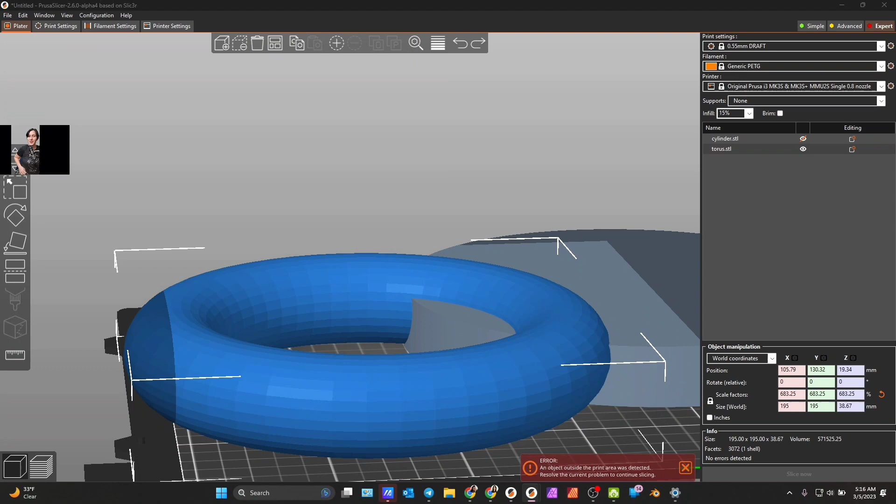Well, I'll just show you. I'm going to take this and move it to the side because I had everything measured out, and it makes it easier to just have it to the side. I have a 2-screen setup, and it makes it easier to just have all the measurements so that I don't have to waste time using my broken caliper. My caliper is off by half, so I have to look at it and try to make it work, and it just doesn't want to work for me.

So we're going to not do that. I'm just going to use the measurements I already have, make things go faster, just be as efficient as possible because everyone loves efficiency, right?

So we are going to use our Prusa slicer, and I'm using, if anybody is interested, the Alpha 4 2.6, the one that has the organic supports. But you don't need, for this, what I'm doing, you don't need to have the Prusa slicer 2.6 for most of what I'm doing, okay?

I will try to remember that most people don't have it. The only thing that maybe you might want the 2.6 for is this, I might cut something on its side, but I'll try to remember just to rotate it and then cut, okay? Because that's what I did for the longest time.

I never used the rotate. And to be honest with you, the rotate tool, the cut by rotate still needs a little bit of work because as you rotate it... so quick note, I do everything on the right-hand side. There's a table that when you open something, here, I'll show you.

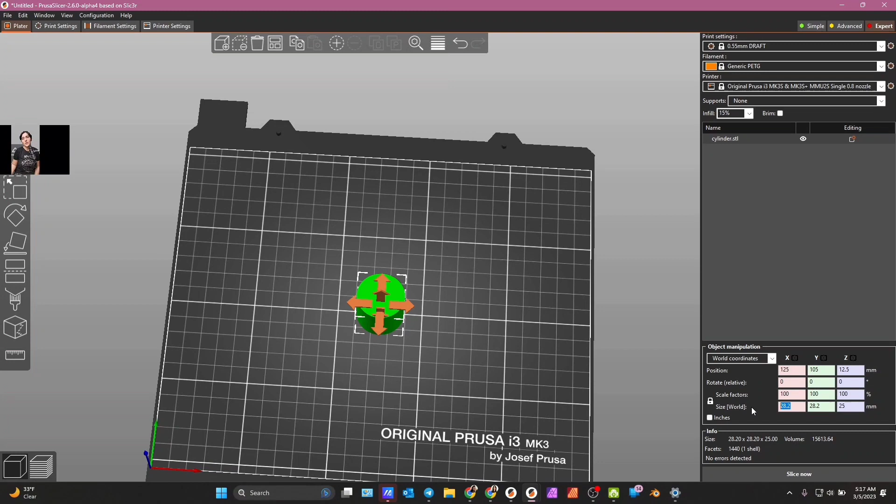So first, really quickly, we're going to go to Shape Gallery, and we're going to add our cylinder. Add to bed, okay? So you're going to want to make sure that it is at least, so that it doesn't fall over, you want it to be at least around the same diameter as the spools that you're putting on top of it. So that's about 200, okay?

And you're going to want to unlock, or you're going to have a really tall item, and that's just not going to make sense, okay? So let's put this to 25. That's about right, okay? Now, what we're going to do is, like I said, right here you're going to notice that this object manipulation came up, okay?

So I do mostly everything to the right here, all right? Now, that's kind of important because I could rotate things on the left, but if you rotate it like 270.5 or 90.3, well, if I go to rescale that object, you're going to have a lot of problems.

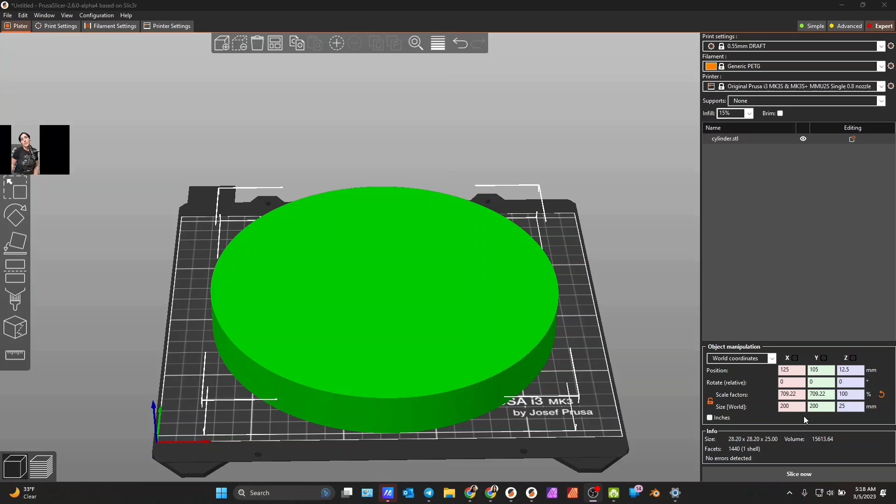It's not going to scale exactly. It's going to scale a little bit slanted, and it will cause problems later on, and you have to undo a whole bunch. It's a headache. So don't do it. It's tempting. Don't do it.

And when you do everything on the right-hand side, it's kind of nice because what you can then do is say, hey, well, I did that by 90 degrees, I'll just undo it by 90 degrees. And you can actually do negatives in the side, in the rotates. So highly, highly recommend getting used to it. And it gets really fast, okay? You get pretty fast by it, okay?

So quickly, let's move on. We are going to go Window, Shape Gallery. We're going to add a torus, okay? Add to bed. Now, the torus is going to be small, so let's make this 195, okay?

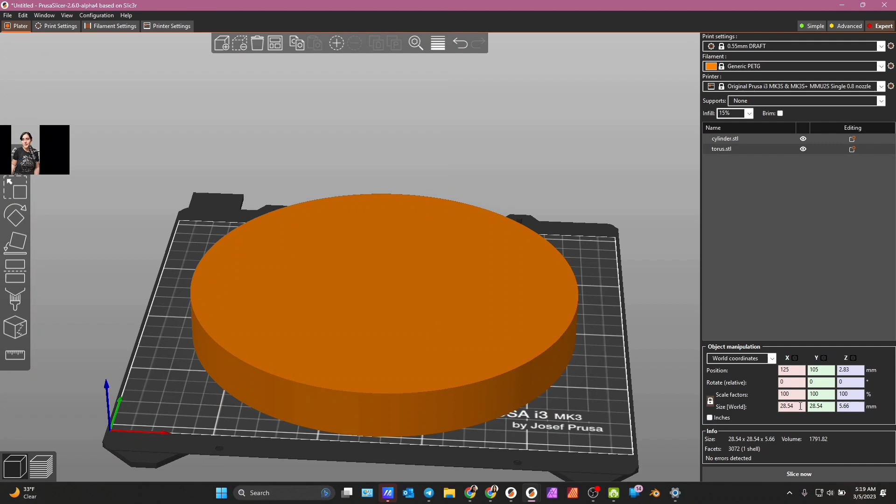This is probably the one time I could have kept the torus locked so that it will keep somewhat of the right size. We're going to cut a little bit off the top, a little bit off the bottom. Otherwise, we're going to have little rings, like right here, if you notice.

The first time, of course I dropped it - it's the drop troll. So right here, there are little rings, okay? Because when I did it originally, instead of cutting it on the bottom, I just made more toruses and subtracted them that way.

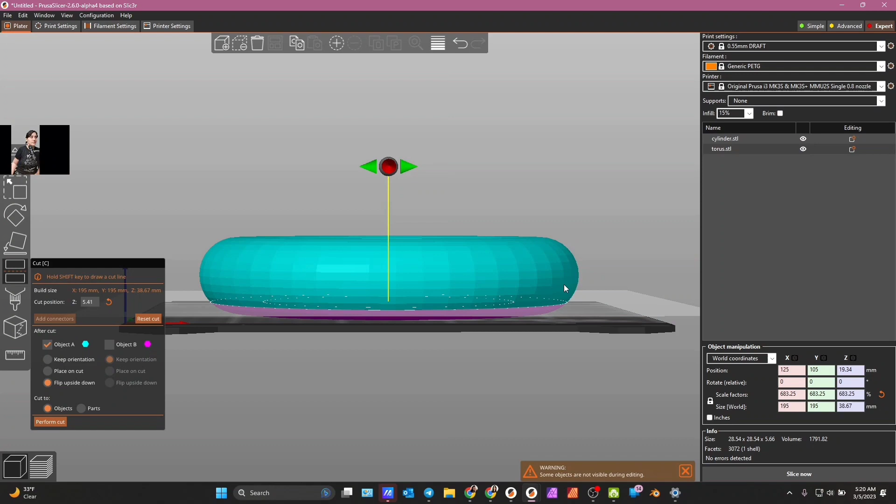But this time we're going to cut it so we don't have that problem. We're going to cut from the bottom and go down because you want to keep the curve. If you cut up too much from the top, you're not going to have much of a curve, and you want this kind of nice curve. So let's take off 5.

And we're going to only keep A, we don't want part B. Now let's cut again 5 - I flipped it upside down so I didn't have to do it, and we want to cut it off the bottom. You could cut it off the top, but it's easier to cut off the bottom, so that way you cut 5 off the top, 5 off the bottom, same off both. Perform cut, and you're only keeping A.

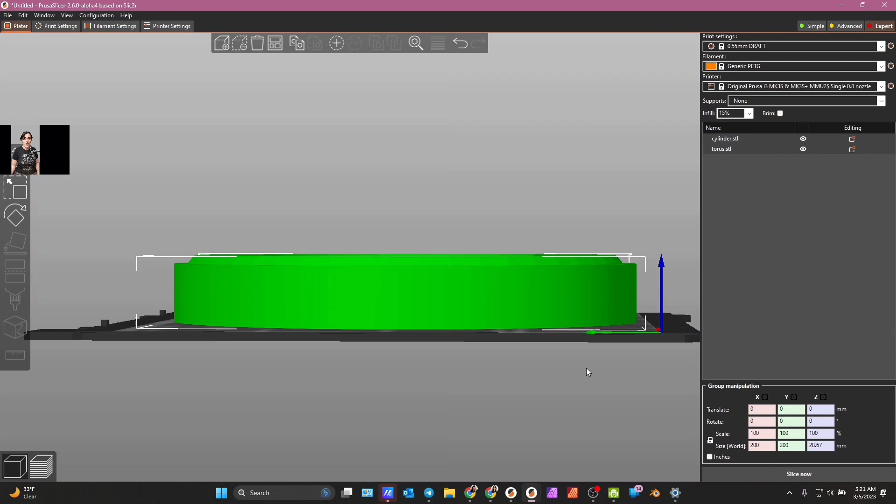So now what we're going to do is merge them together. You can hit Control A, but let's say you had more objects on the plate - for some reason you have to click the item, shift-click to click on both, and then right click and hit merge.

But over here under name, you would hit Control. I don't know why - I don't know why it's different. But whatever, it might be because it's alpha 4, maybe it's different in alpha 3. I don't remember, we're not going to linger on that.

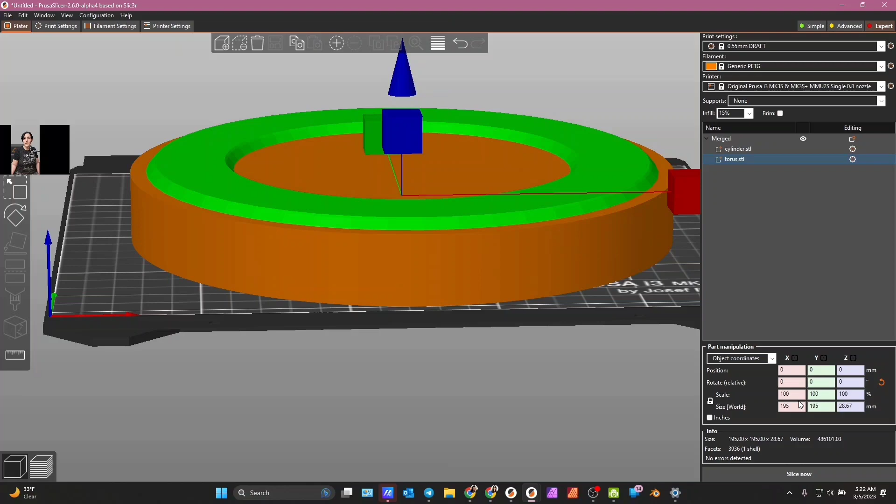So we're going to make sure that everything is centered. Under merged, we're going to hit torus. I'm going to go to object coordinates, and you see X and Y are 0. That means they are centered perfectly in the middle.

So I'm going to right click, we're going to go change type, and we're going to make it a negative volume. So when you slice now, you're going to notice that maybe that's what you want, but that's not what I want. We're going to need to move this up a little bit.

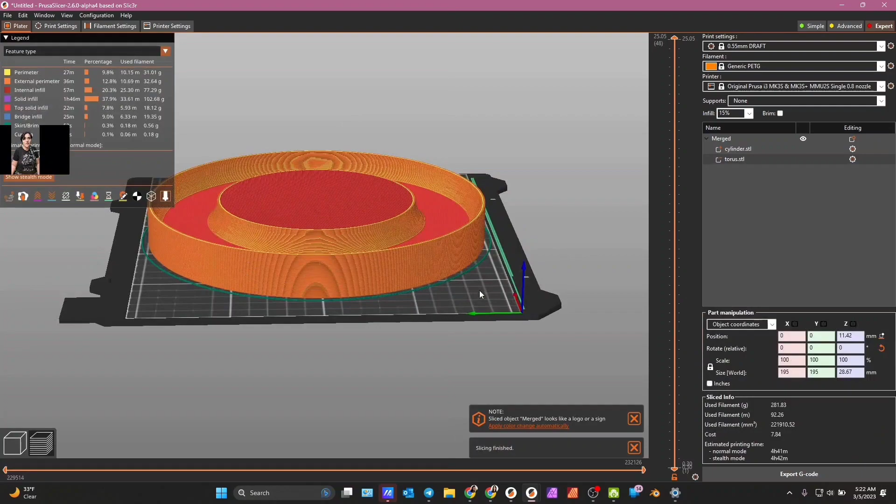So let's slice now, and you're going to notice that that is what we have now. So I'm going to want to move that up just a little bit more, to like right there. So let's slice now. And it's kind of good to have a little bit more on the bottom because that way you have a little bit of weight on the bottom so it doesn't topple over as easily.

And then if you want, you can even lift it up more, or if you want, you can make the base a little bit smaller. You can make this cylinder - it doesn't have to be 25, it could be 20 if you want it to be.

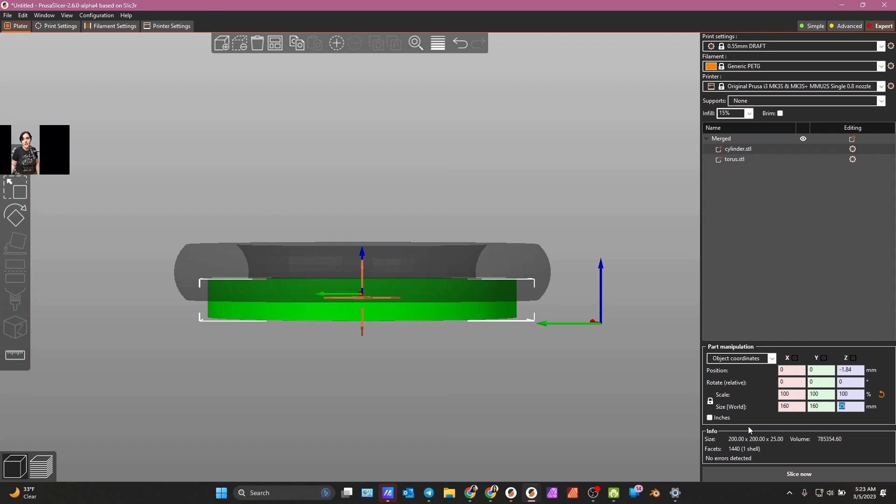Oops, sorry, never mind. Let's take this and undo the lock. We're going to go 20. Okay, now let's see how that looks now. You'll notice there's a little bit more of a curve now. So we're going to want to make this part not as big.

So we're going to take the torus. Now you could first do the toruses and then copy and paste it, but I recommend first making it into a negative volume and then copying and pasting, because you can't click a whole bunch and then change type - you'd have to do them individually. So if you have like 15 that you want to make into a negative volume, you have to do it individually.

So first change it to a negative volume, then we're going to copy the torus. We're going to paste and then resize that, and resize it over here.

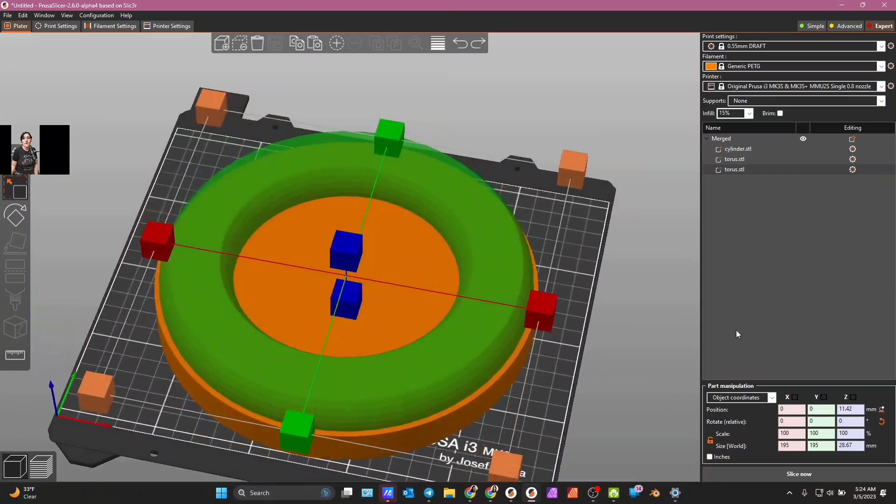You might be tempted to resize it on the left, but you'll notice that if I resize it over here, it's also going to resize the Z. So when you hit slice, you're going to see that weird thing. That's not what we want, so we're going to undo that, and resize this over here instead.

So let's say we want our size to be 170 and 170, and we're going to keep Z alone. You could probably even go 160, and then you kind of play with this until you get exactly what you want. There's a lot of playing with variables, and you'll see that is much bigger.

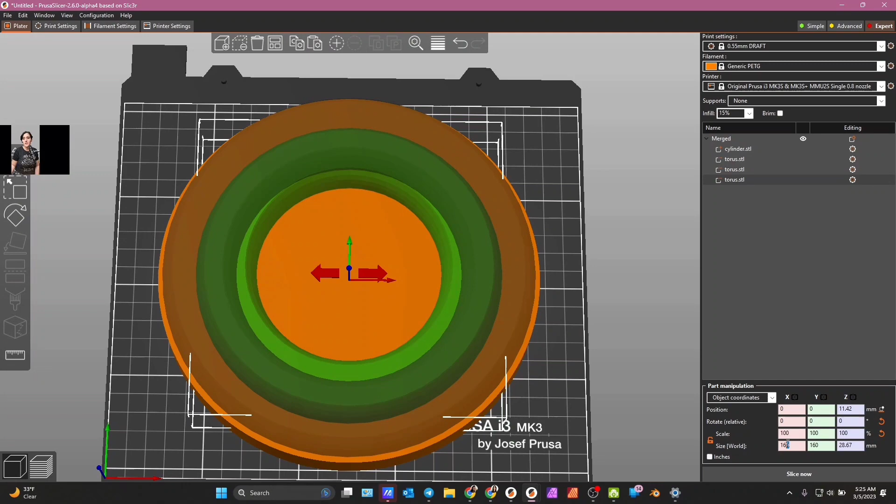It's bigger now. Then what you could do is add a third one, or just play with it, but for video's sake and making it faster, I'm just going to copy and paste a third one. I'm going to make this 140, tab 140. I could probably do 130 on that one.

So there you go. You'll notice that it's much better, and it'll make it a faster print too. So now we have that.

Now what we're going to need to do is first, real quickly—this always kills me. Bye-bye. Okay, so how do we get that part that you just showed me where you screw one thing into another?

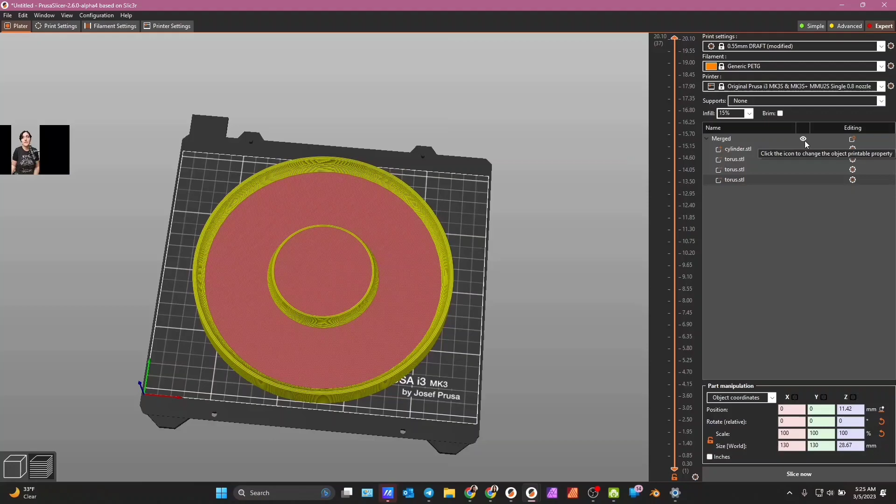First we're going to take this and take it off the bed for a second, and we're going to move it off. This is the one thing I actually do use on the left—that moving the item off.

Now we are going to go to Window, Shape Gallery, and notice that they have already loaded an M3 screw. We're going to add this to the bed. It's itty bitty, it's so cute, so let's make this itty bitty M3 much bigger.

Let me see what I had the sizing as, so that we can get exact sizes. Let's see here—no, that's not the one I want. Okay, let's find the one that I need.

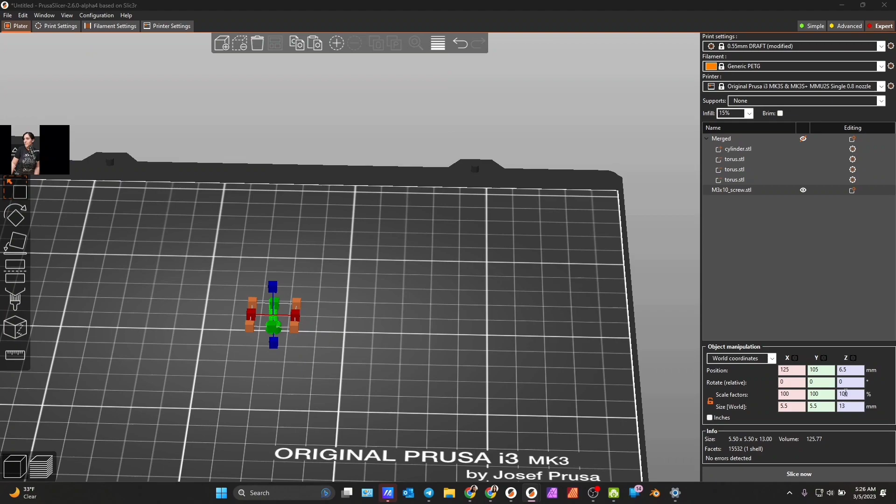Okay, the size I had for that would be... so we want to make this 85.08. Let's make this 85.08, tab, 85.08.

Oops, that's not what I wanted at all. We all make mistakes. And to be honest, I just realized that these are my scaled down version sizes—this will be the size after it's been scaled down 99.5%. I just realized I accidentally closed what it was before, but this would have been like 86, I believe the original was, so I'll just do 86 to begin with.

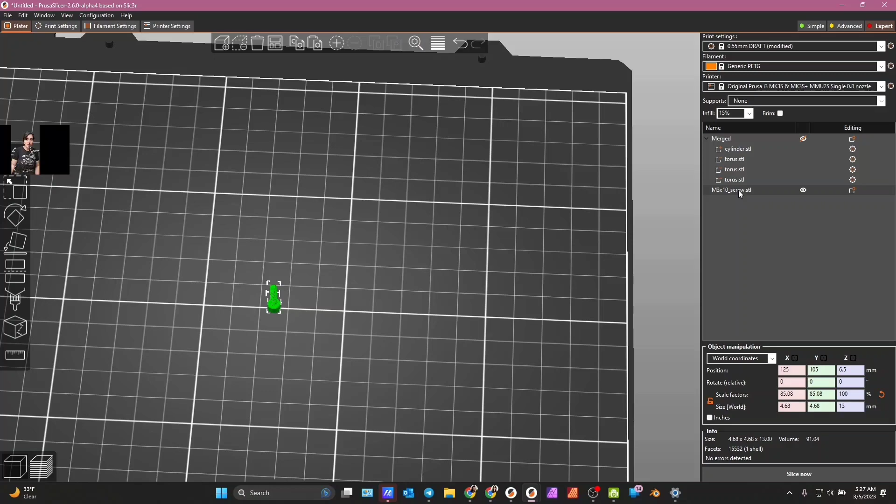We'll start with 86 and I'll show you how I would make it smaller, just so you have that if you need it. So we're going to first just keep it scaled—we'll start there, and go 86, tab.

You're going to notice that you have something much longer and bigger than what you need. So we're first going to cut it down, because we don't need one that's that large.

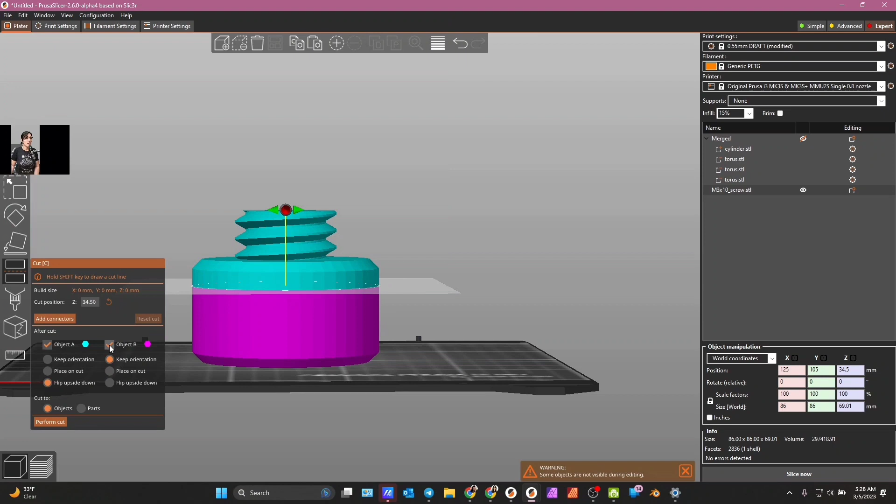So we're going to only keep B because we don't need A. Then we're going to cut it again—this time we want A but not B. Go about right there, and we're going to perform the cut.

Now what we're going to do is—this is 86, now remember, well first let me create it. So first we're going to create the column.

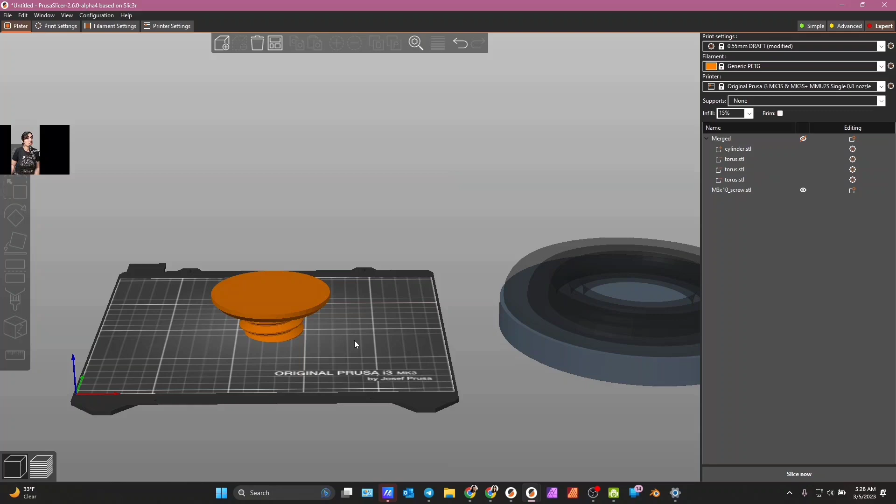Now what we're going to do is go to your Shape Gallery, add to bed. We're going to make this column 86—is it locked? Okay, so yeah, 86.

Now we're going to merge them together. So let's merge them together—click the two you want, so click, control-click if you're over here on the right, and you're going to hit merge.

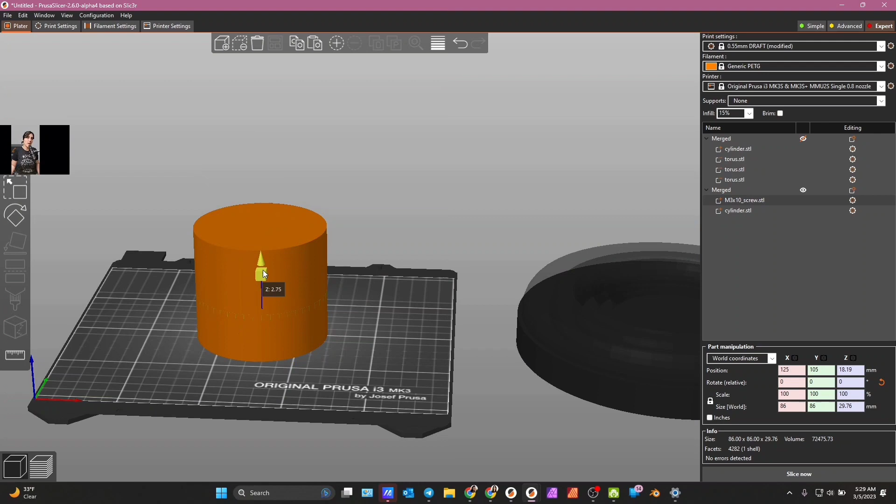Now what we're going to do is move—and the reason you do it that way is because before you can move one item up or down, you have to click on the one you want. So now you'll see that it's like that.

So this item is going to fit into there, okay? Every once in a while it does give you problems. Sometimes when you scale one item, you'll notice, like if I were to... well, we'll just do it, it'll probably come up as I make the video. But sometimes you'll go here and you'll have this... well, let's just do it, okay? So, lost my train of thought.

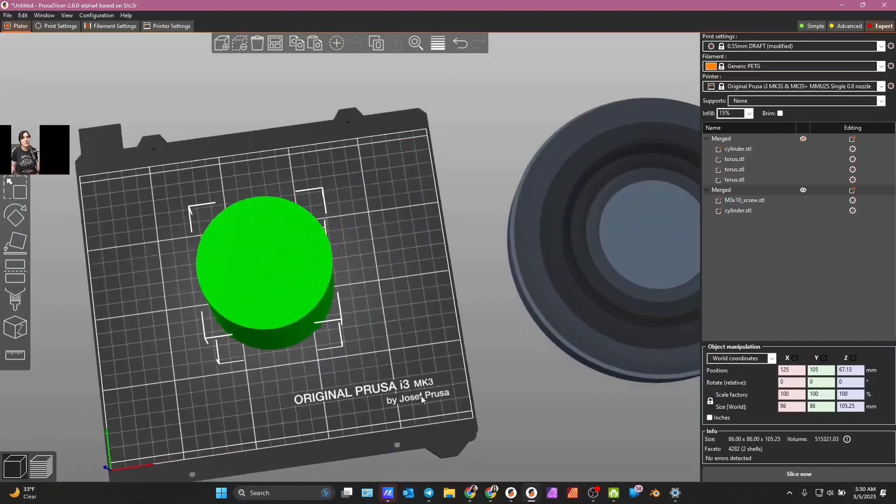Okay, so this you're going to notice right here is a little bit too big still, so we're still going to want to cut it. So I'm going to cut it, and we're going to keep the top. Object A. Yes. Cut. Okay, so that looks like it'll be good.

Now what you can do, if you want, you don't have to, is scale this like so and make it a little bit bigger so you don't need supports, okay? Because if you have about 45-degree angles, if it's like 45 degrees, then you don't need supports, all right?

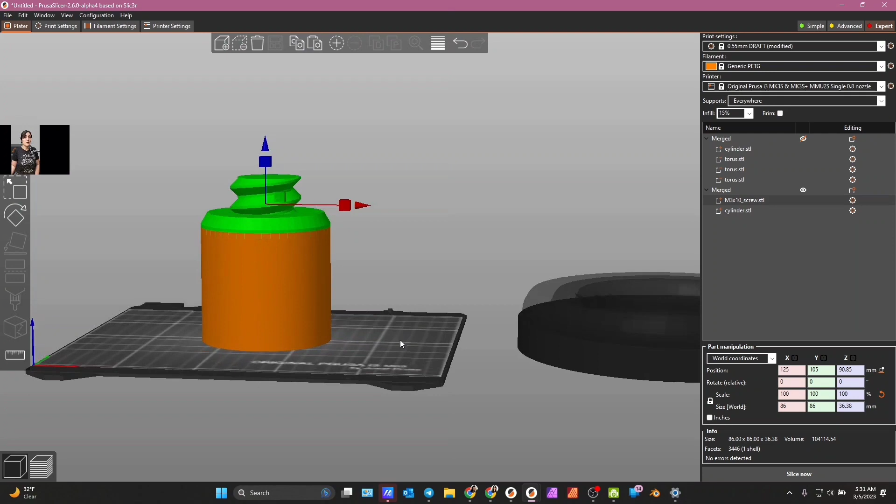So if I were to hit slice now, I'd have supports everywhere, yes, and you want to do this before you make this part a negative volume, okay? So let's scale this.

And let's go to our print settings and support material. This is set to 50. Let's make this 45, you don't want to go any lower than that. Okay, you'll notice that I have supports everywhere, but this does not need supports, okay?

So that might still be a little bit too tall, because if I were to put that into there, it would probably go through the bottom, and then it would be kind of wobbling off the bottom. So we're going to have to cut it a little bit, okay?

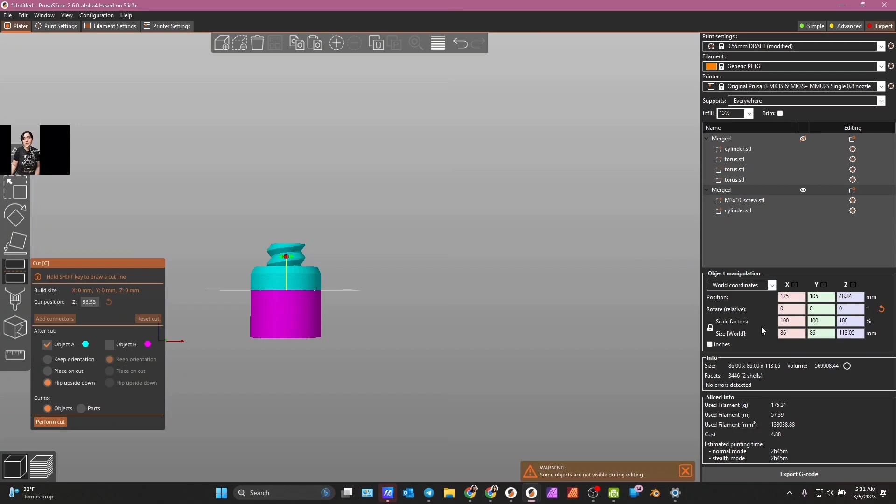So what you can do is, if you notice that this right here, the height of this cylinder is 20, okay? You can flip the whole item by 180, okay? And let's see, go down, okay.

Or actually, I should have kept it the other way. I just realized I should have kept it the other way. 180. Let's cut, so from the top, okay, bottom part.

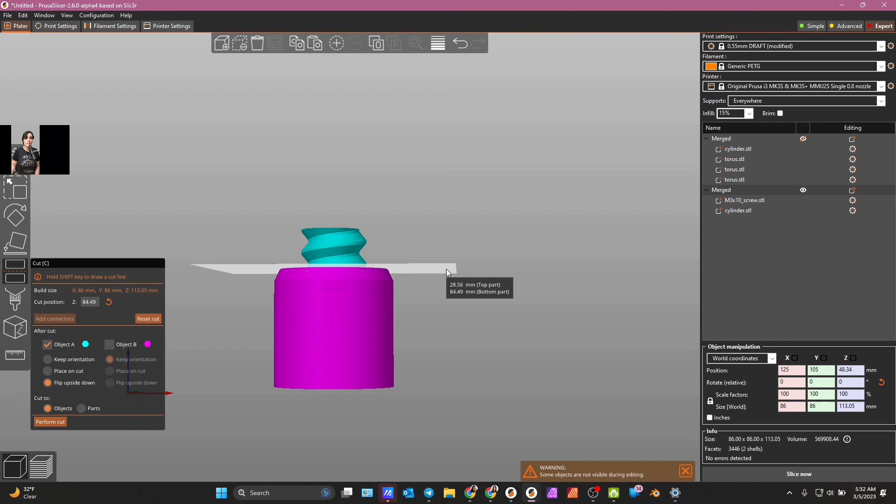Okay, yeah, so the top part, it seems like you don't have to get it exact. You're going to want a little bit of wiggle room right there, okay?

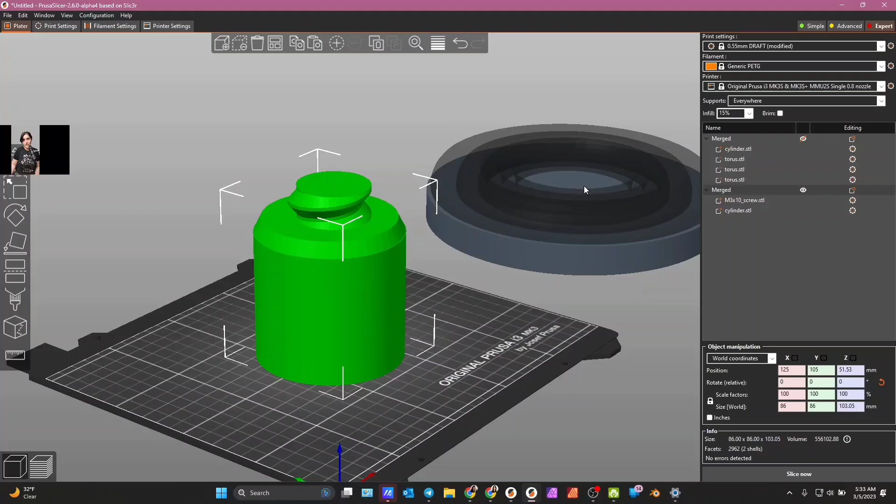So you know what, let's do the 180 again. I'm just going to cut off the bottom, I like cutting off the bottom. We're going to do 10, okay, and we're going to keep object A. Okay, so that is going to need to be subtracted from there, okay?

So what we're going to do is I'm going to copy and I'm going to paste, so we're going to have two of these items, okay? Now you don't need both parts of this, so to make it a little bit easier, I'm going to take this here, okay? And I am going to, like I said, in order for this to fit, to go here...

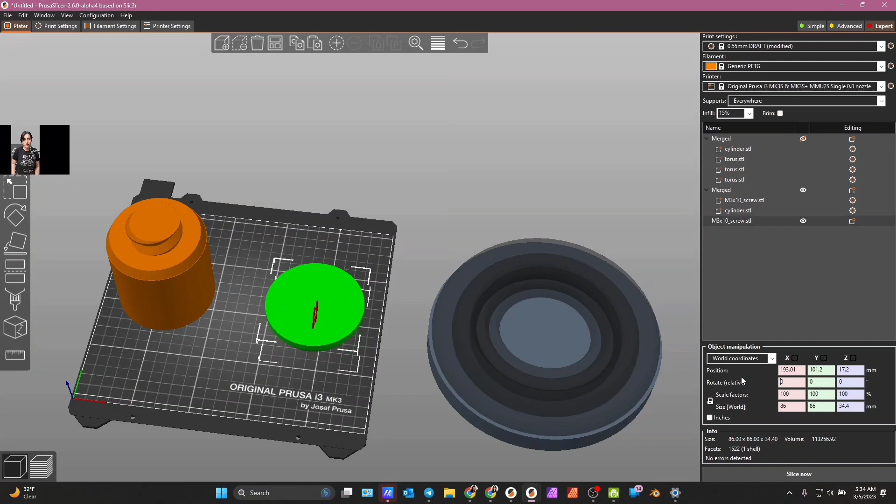What first we're going to do is we're going to take this, I'm going to split this into objects, okay? Come here, and I'm going to delete the cylinder portion. I'm going to turn this upside down. I'm going to bring this back to the plate. I'm going to click these both, and I'm going to merge them.

I'm going to center the items with the object coordinates on the right, and then I'm going to go down, okay, and I'm going to zero the X and the Y, so that is exactly centered in the middle, okay? I'm going to bring it up.

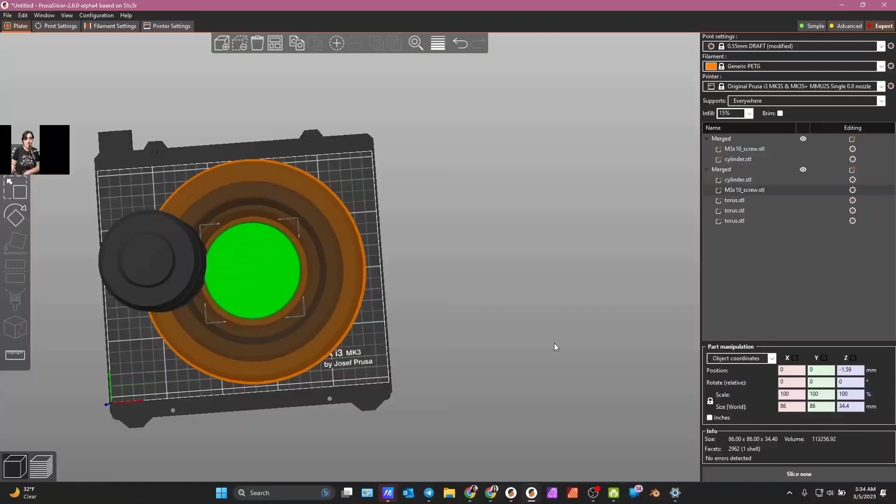We're going to make this into a negative volume. Okay? Now, let's see how far it goes down. You'll see that it goes down, and that's the part that can be screwed, okay? So you can also make it go down a little bit more.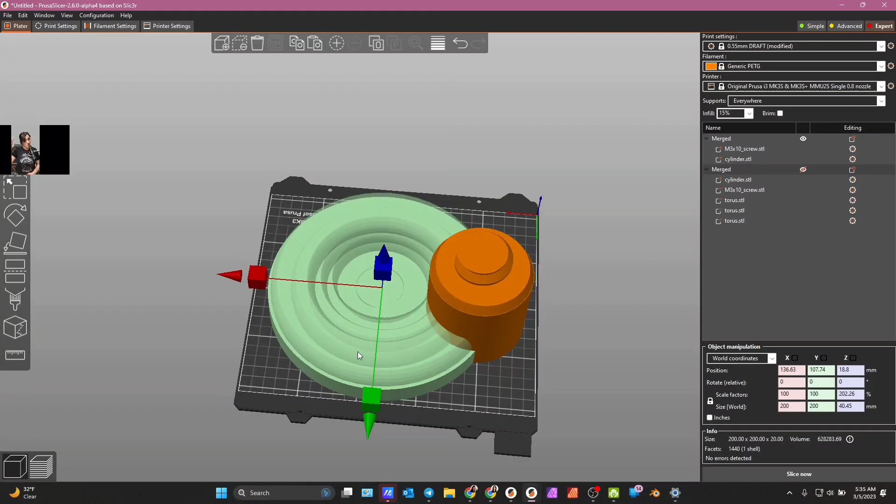Slice now. All right, so now I'm going to make this part so it doesn't show. Now, like I said, I use a 0.8 size nozzle, okay? Have to keep in mind that if I do it as is, this part is going to be such a tight fit that you're going to have so much friction, it's not going to fit in as well as you want it to.

So you're going to have to take this, and I found that 99.5 works really well. So you're going to want to scale it to 99.5, okay? And then that works really well.

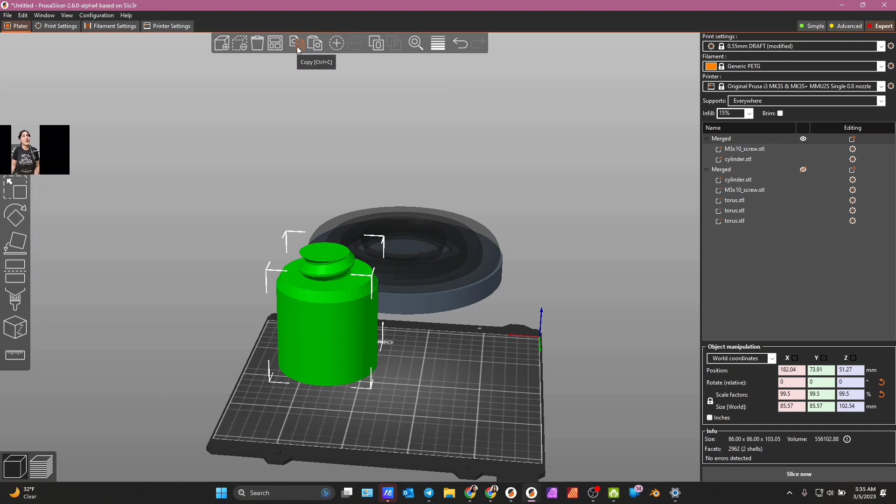Okay, now for the next part. So what we're going to do is I'm going to be what I feel is efficient, okay? You may call it lazy, but I'm going to say efficient. I'm going to copy, I'm going to paste, and the part that we need next, let me take this part off, is the part that fits. So that was this part right here, and that part is what fits into here.

Now, you'll notice that this part is bigger, so the spool can't fit onto that part, but what you need is the spool to have a smaller diameter so that it can fit inside. So when I measured it, the cylinder was like 72, okay, so we're going to make this 72.

Let's see, so we're going to change this to 72. We're going to unlock, okay, we're going to do 72 and 72. And the height that I used, altogether the height was 140. So if you change the height, remember you're changing the thread height as well. You want to change it, if you're changing the whole item, before you make a negative volume, because you're going to take this and make it a negative volume for this item.

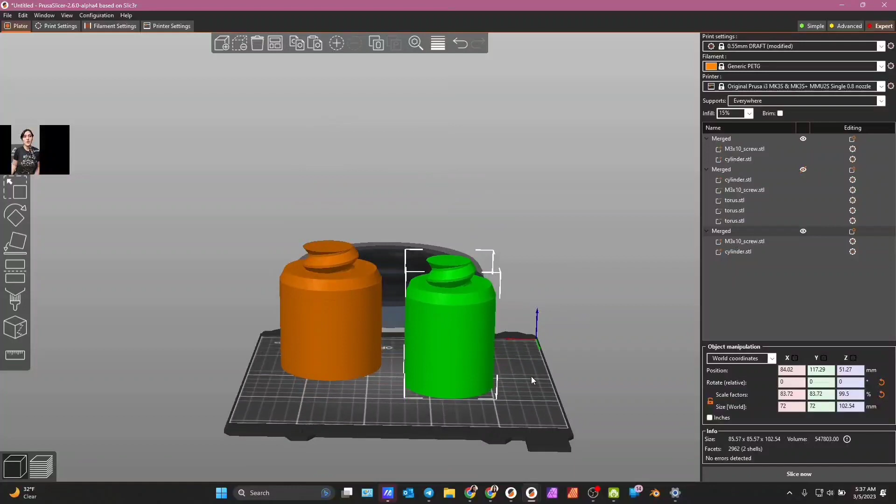If this part has already been used as a negative volume, then you would just use the cylinder portion and change the height of that instead, not touching that part. But since it doesn't matter right now, we can change the whole item. So we want the height to be 140, I believe, because we need to be able to fit both spools.

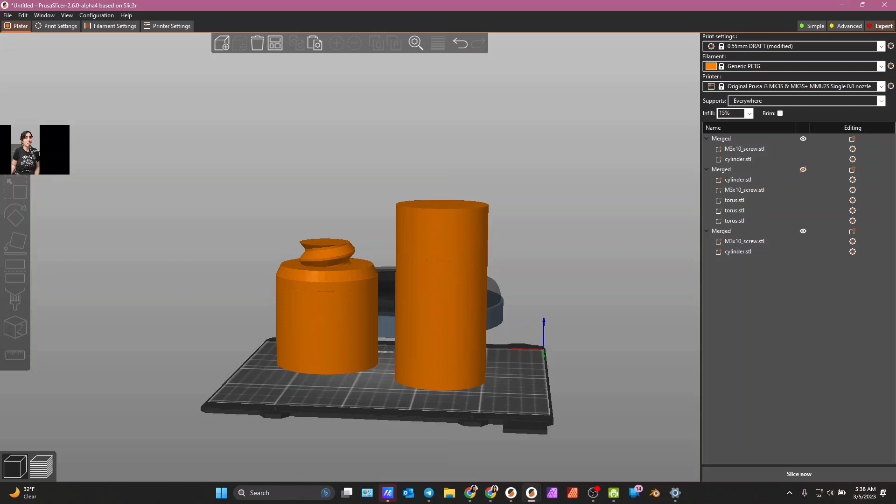All right, let's do 140. Not 7,000, 140, just 140, okay? Well, the whole item's supposed to be 140, that's okay. So here's what I'm going to do: I'm going to move the M3 screw up to the 140 mark so you can just see it.

And now if you want to use a scale, this is where I would use it, but I would use it on the cylinder. And we're going to move... no, why? So this is why I don't use a scale, okay? So I am just going to move.

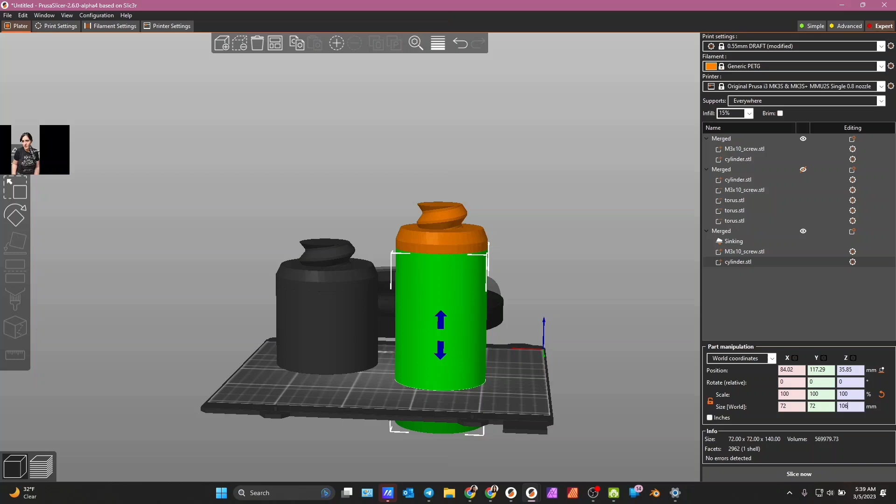Okay, so I guess we're going to take off 34.5. So let's take off, so 34, oh let's just make it 106. Let's see if that works. Oh no, that did not work the way I wanted it to, but it's okay. It'll be fine, I'm telling myself. It's altogether fine.

139.34, that's good enough, right? One, it'll be nice when you can just take this item and put it... no, okay, so let's do this. And then, you know what, I'll just do 140. It is so close, it's okay, all right, it's okay.

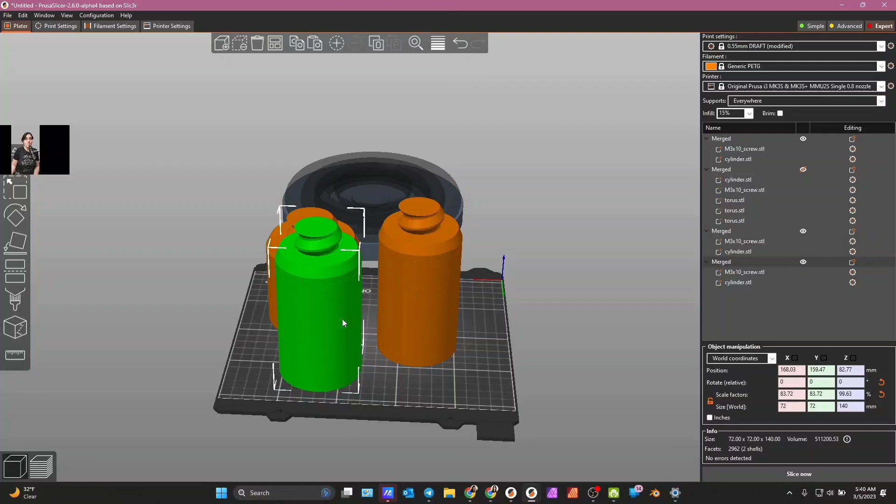So now this item is going to be a negative volume to that. So we're going to copy again, copy, paste. Let's move this one off the bed, so we leave that one alone. We're going to again make this into objects, delete the cylinder part of this, and merge it to here.

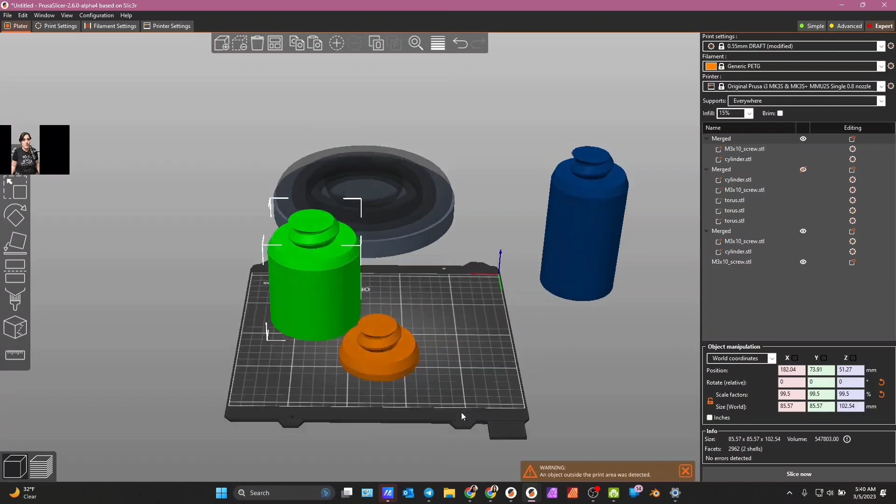Okay, we're going to zero out all these variables, only the x and the y, okay? It does get a little wonky at first, but then everything centers exactly where you want it to, as long as you don't do the z. Unless you want to do the z, you may want to, but we don't in this case. Then we're going to turn this into a negative volume.

Change type into a negative volume. Okay, slice now. And it will show like that because it has to have supports, okay? But what I needed to have done is move it down a little bit, so we don't need that part of it, okay.

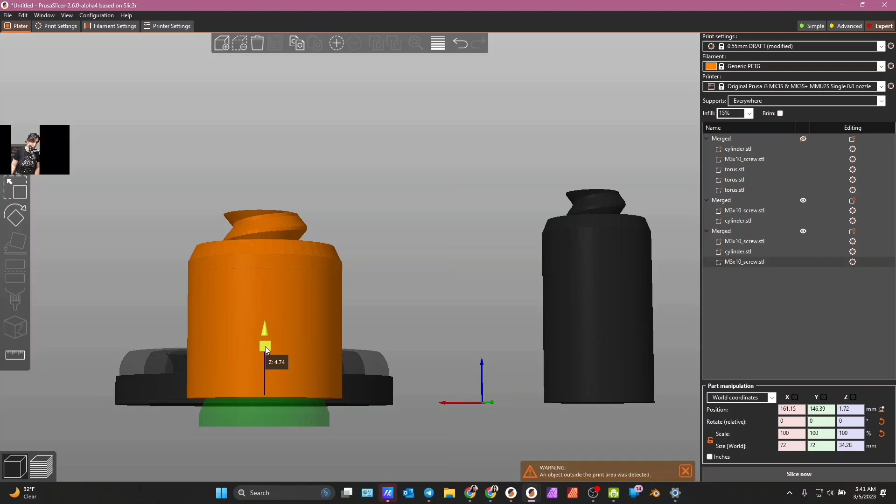What I probably should have done, okay, slice now. So you'll notice that only that part is, okay? So you'll notice that when you come in, you'll see, you can kind of see how it will be like a thread, okay? That little threaded motion there, okay.

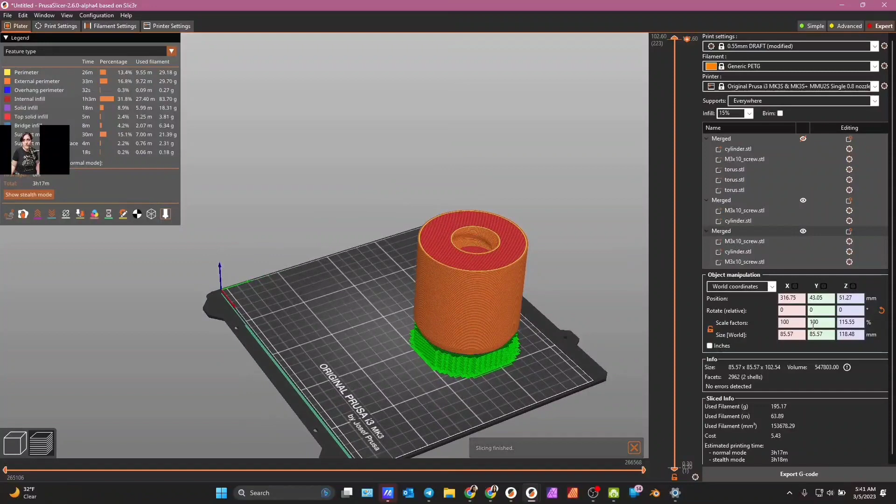If I were to turn the whole object upside down, and then slice it now, you can see the threaded part, okay? So I just did that for demonstration so you could see what I needed you to see there, okay.

So let's go back, okay. Now I'm going to move this to the side now that you have it. Okay, now remember, this whole item over here needs to be 99.5, but look, when you look at this merge right here, this is what I was trying to tell you earlier. It is 83.72. You can't really 99.5% that, okay.

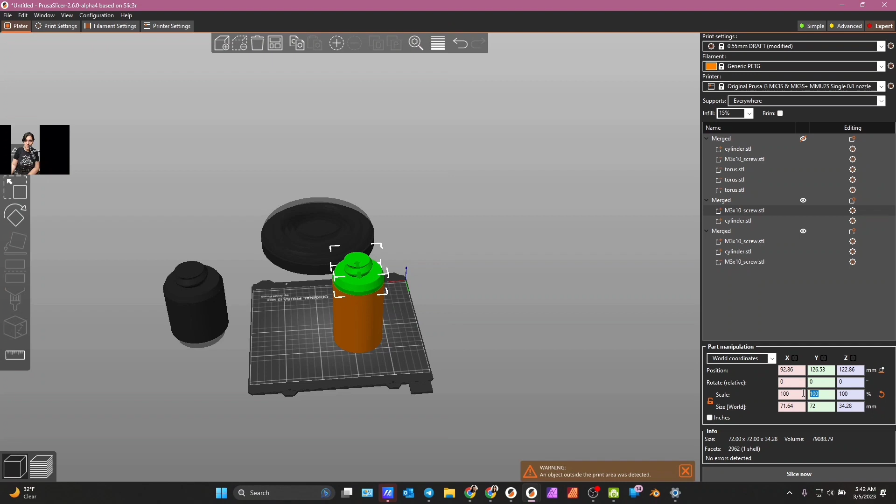So what you have to do is go under the individual, okay? Now, for some reason, when I press enter, or when I go and hit the next box, that goes to 100, okay? I don't know why, but it might be an alpha thing or just the way it works. I'm not entirely sure, but 99.5, you do it for the X and the Y, okay? And then it will be where you need it to be. So, now that we created that, I'm going to move it to the side, okay.

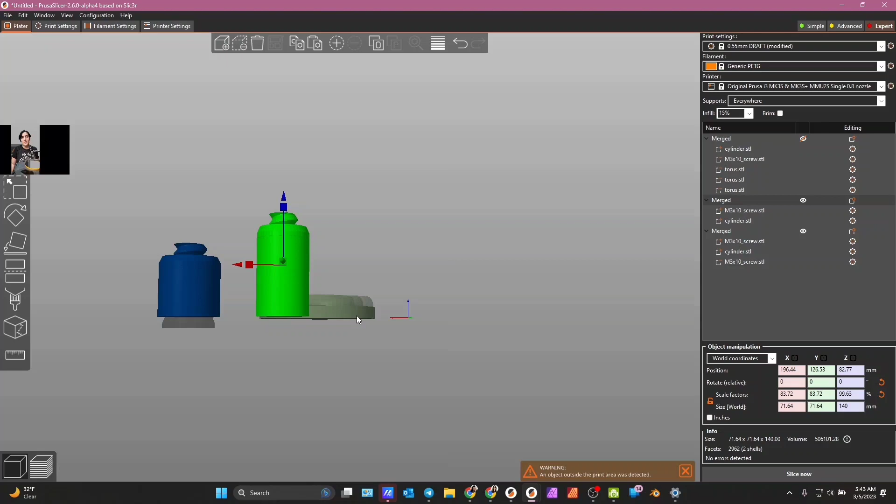Now, we're going to create a bottom, okay? Before, when I did this, I did it like this, and I kind of wished I had made the top separate, because it would have been easier, I feel, than doing it this way. But you are free to just add a cylinder to the top, and you could just have one piece if you wanted to, okay? And then you would just add a cylinder, do it that way. But I'm going to just practically do the same thing.

Copy, we're gonna paste here, okay, and this is what we shall do. We will take the cylinder, we will just make it smaller. I'll make it a little bit thicker so it's not so thin. Let's make it 5, okay.

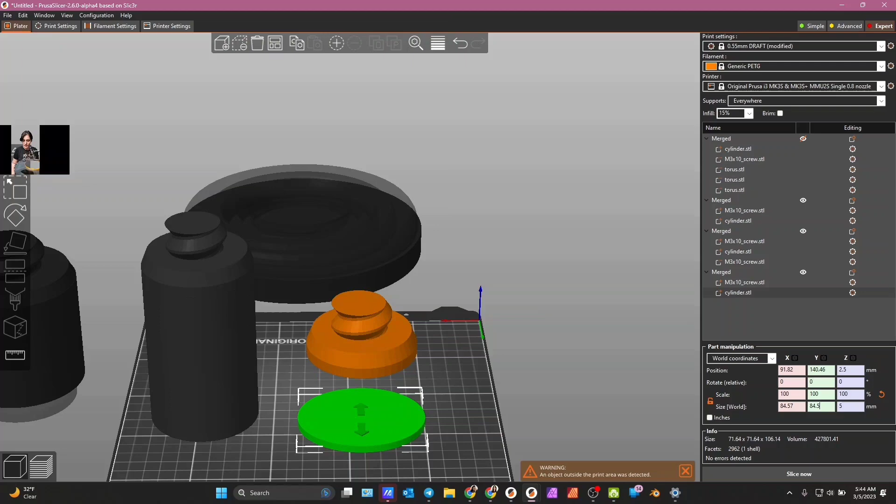And what did I measure that to be? That was measured to be 84.57. Yeah, 84.57. So 84.57 and 84.57, okay. Now we're going to take this part, and you know what, we're going to cut.

We're going to cut it this time. Okay, so let's cut. And you could have done it this way for all the rest of it too. We're just going to cut. So before you do that, there's a little trick you can do: if you want to cut it, you can keep both parts, or

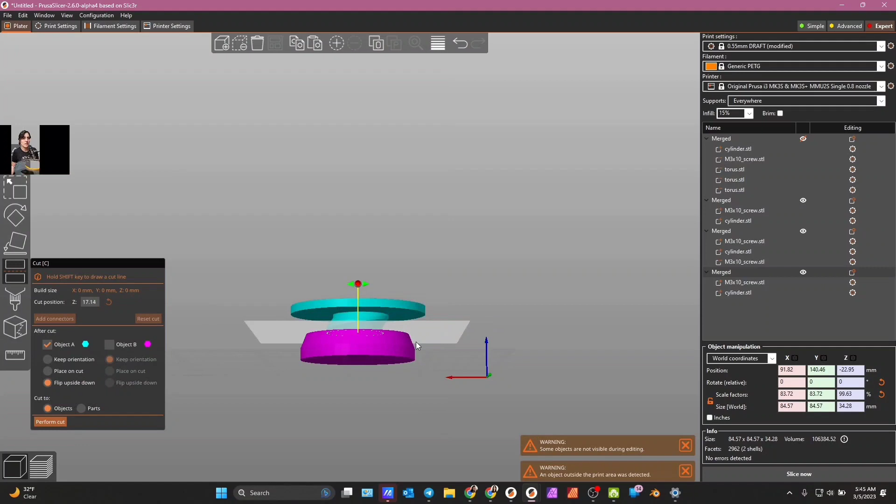what you can do is move this part higher with the part you want to keep, okay? Now when we cut off the part we want... okay, so we are going to only keep A. Now we're going to flip everything. I keep forgetting to turn the flip upside down thing off.

We need to move the cylinder down, okay, and we need to move the screw part up, okay, so that will be in the top, and then we're going to make this a negative volume for that, okay? Kind of the same thing, okay.

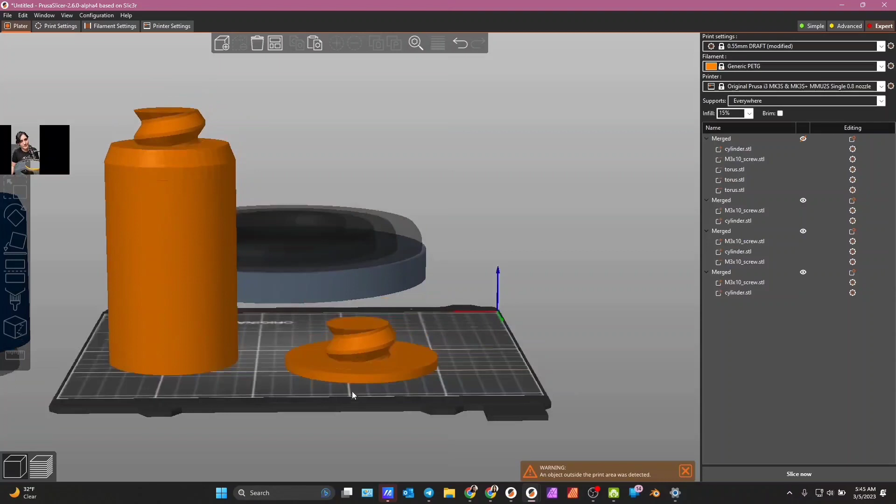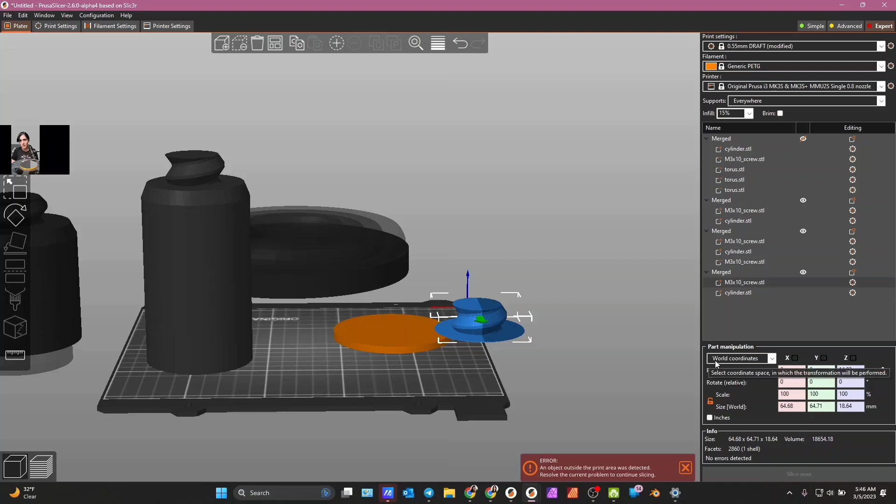Oh, object, it needs to be object 0, 0, 0, okay? So, copy, paste. All right, so here we go. So the reason why I don't just come and delete it, because if you just delete the cylinder, it will just say merged, okay? That's why I go ahead and just split it to objects.

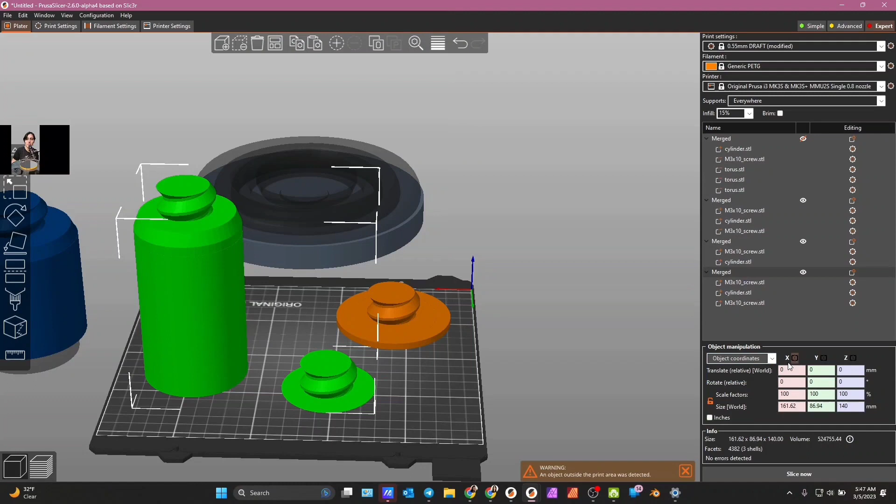Cylinder, take this one, we're going to shift, merge, we're going to object, okay, and then zero.

Okay, move this part down just a tiny little bit, and make it negative. All right, slice now.

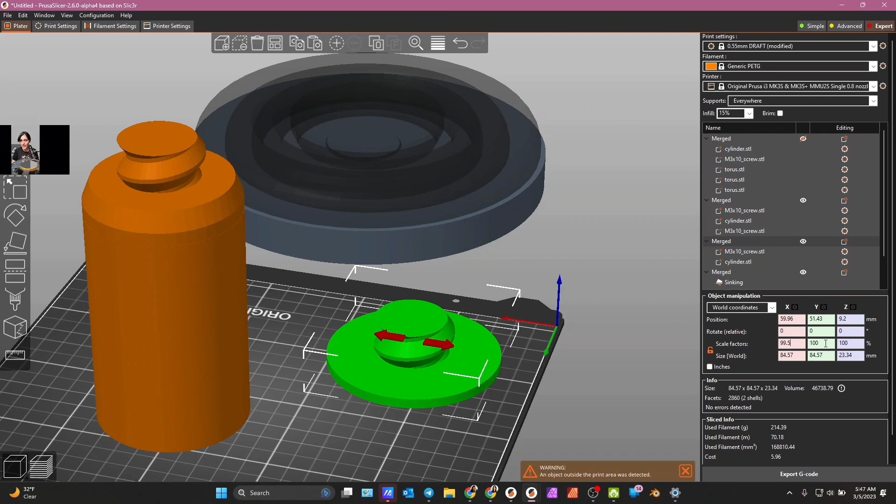Remember again, over on this one, we are going to want... this time the scale factors, for whatever reason, don't say 88 point whatever, you can just do 99.5. And 99.5, okay?

So now you have that part. Now we need to make the cover, so let's make the cover. We're going to add a cylinder, and first we need to measure the size that is going to cover it. I could have made it go inside, but I felt like doing it the quickest way, which was to make one big cover that just covered it all.

So, shape gallery again, cylinder, add to bed. We need to make that 200.

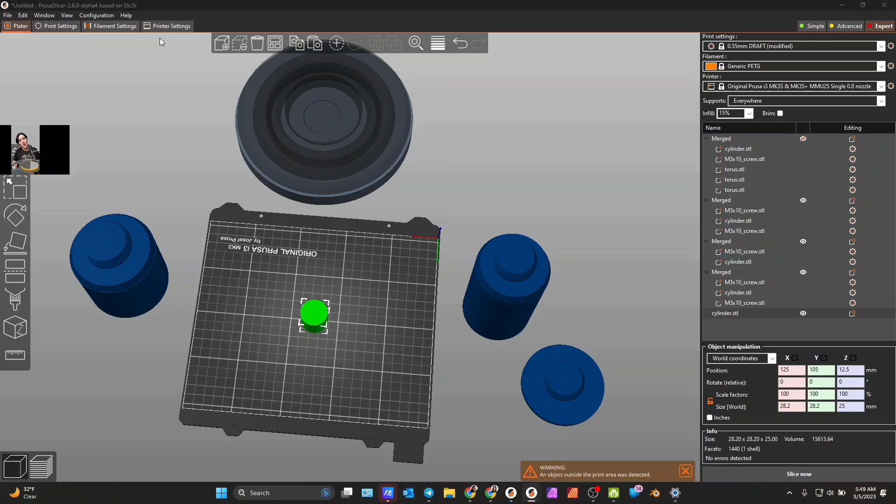First you're going to make the size of what will be the negative volume. Keep in mind that first you make what will be the negative volume, and then you'll make it a little bit bigger. Especially when you work with a bigger nozzle, sometimes the print is a little bit bigger, it's not always as precise as working with a smaller nozzle.

Let's make it the size we want: 200 and 200. I think what I have is actually 200.69, but that's okay, I'll just do 200.69. Height is 124.4. So this is what will become the negative volume.

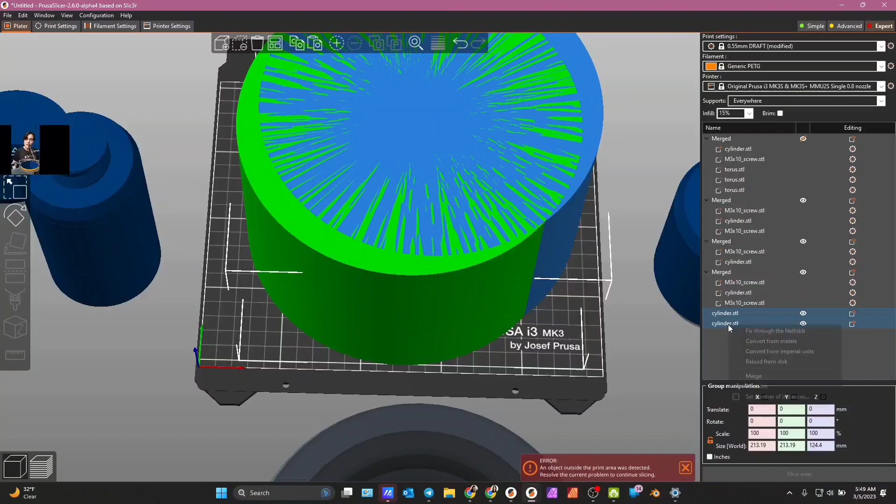But first we need to add another cylinder. So what you can do is copy and paste. This is going to have to be... let's first merge these two together. So shift, click, and we're going to merge. Then we're going to center them, okay, so it'll look like you have one object.

Now you need to make one object bigger than the other. For me, what I used was 206.99, but let's do 206 if you want a faster print. 206, 206, and 126.

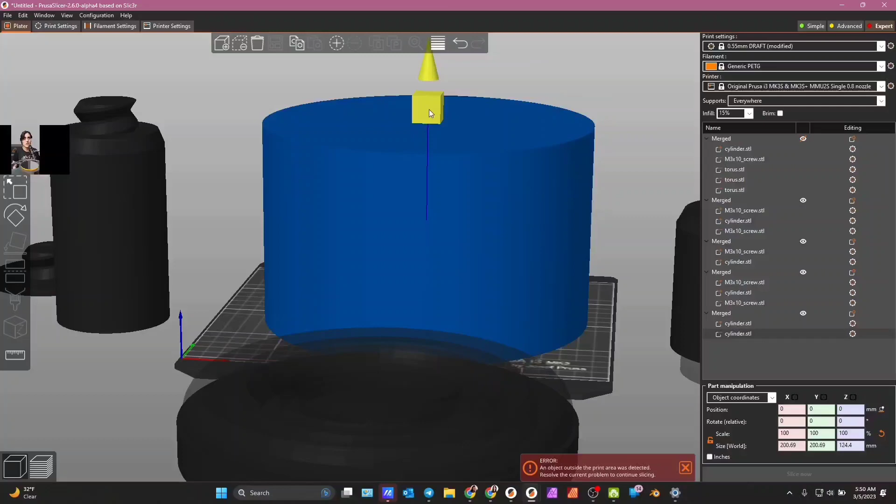Now you're going to want to take the smaller one and make that the negative volume. Change to negative volume, and you're going to want to bring that item up. You're going to want to move the whole thing and center the whole thing. Slice now. So there's going to be a kind of lampshade shape.

I like it so that it comes on and off easily. If you wanted, you could just add this part right there and one part would screw into the other, but then when you want to put treats in and out, it'll be more difficult. So let's just keep them separate.

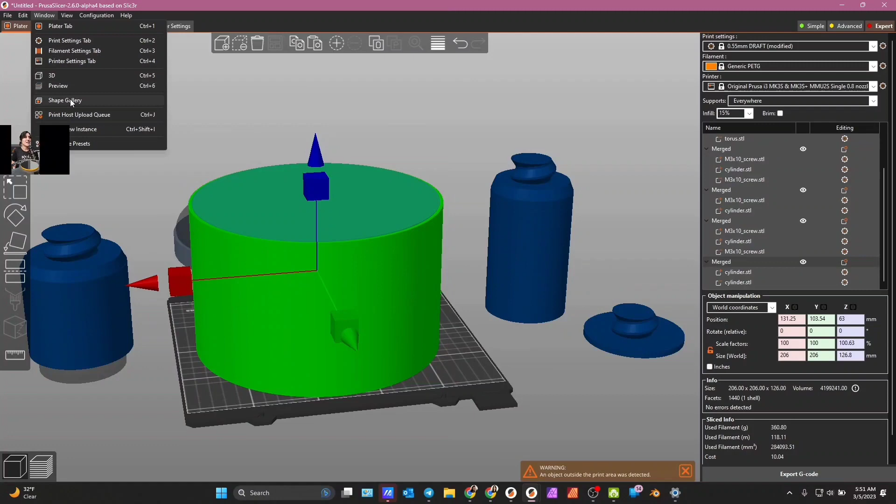What you could do is add that and make it bigger, but I'll just add another. If you want to make it a little different, we can add a different shape - let's add a helper disc, since it's different. So we're going to make this helper disc.

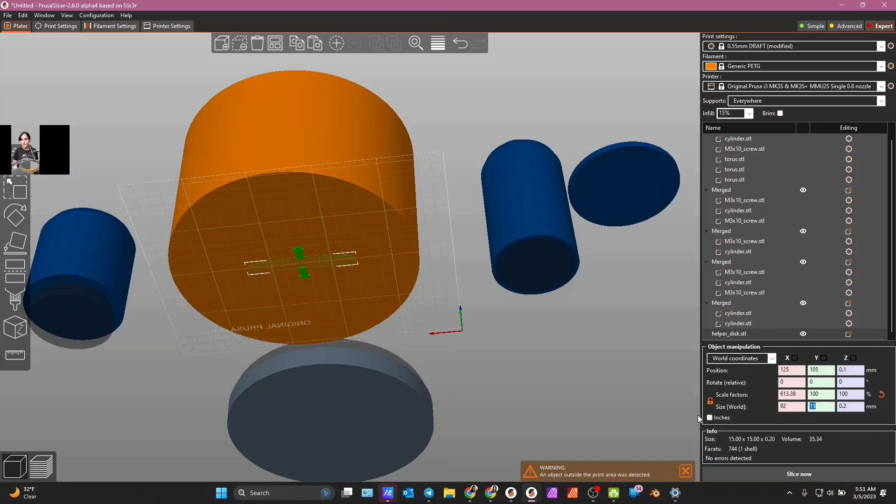What size is this helper disc going to be? 92. So this little helper disc is going to be 92, and we're going to make it 5. And we're going to, is it centered? Let's see.

Oh wait, first let's merge it - first we got to merge. Okay, now let's see here. And object... I do wish that it was object first, so yeah, it's not. Okay, so now that it is centered, let's make it a negative volume - change type, negative volume.

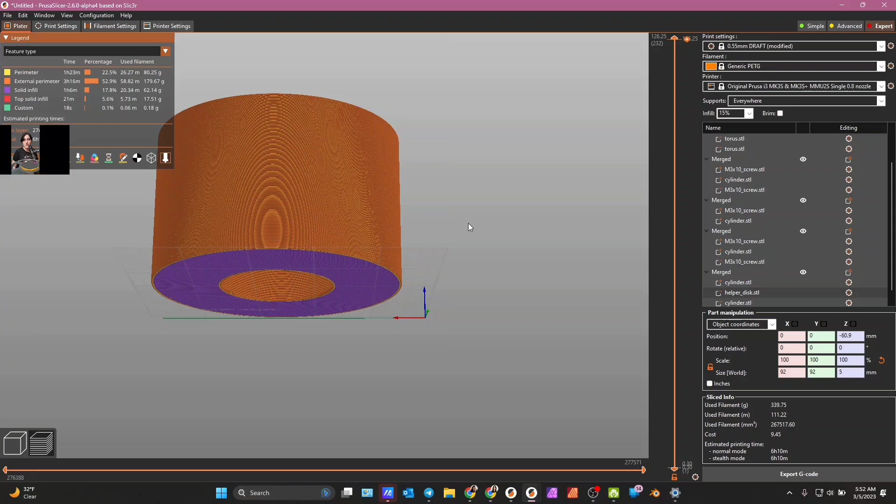Slice now. The nice thing is when you have something you want to print multiple items of, but you don't want to print them all at once, you can just hide them using the little hide buttons over here, which is really nice, kind of nice. So that way, okay.

All right, so that's what we have so far. Now we want to make the little holes, okay? I want to make them bigger than what I had them for here, so that you have a little bit better structure. So we're going to add a cylinder, okay? We're going to do it just a little bit different. It's practically a lot of the same thing.

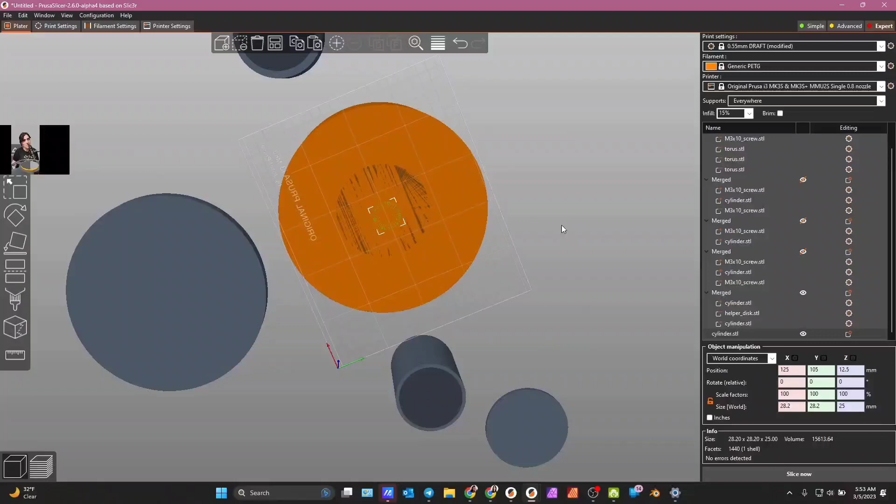This one is a little bit more repetitive than some of my other ones. I mean, I've made a hand on Prusa Slicer before. That one was a little bit more fun. It took a lot of ingenuity to do that one. That one was definitely different. But it didn't move or anything, it was just very basic. I think I have it actually.

I did this in another program for a little while, but I made this Poppy Playtime, and I made the fingers. I drew this bottom part in AutoCAD. I probably could have done Prusa Slicer for the bottom part, but the fingers, this was all done in Prusa Slicer. The fingers itself was all Prusa Slicer, and the negative volume was Prusa Slicer. This hand part, just the shape of it, I did in an AutoCAD program. I did a good portion of this in Prusa Slicer. This was mixed with another program.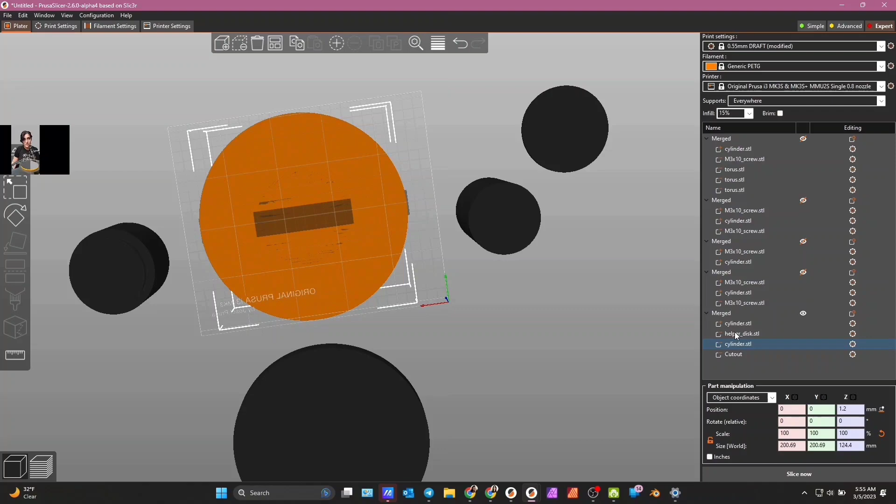So even though I try to move it to the bottom, you can't move it to the bottom until you change the type, and negative volumes like to stay to the bottom, okay? So move it all the way to the bottom because it's important that you move it to the bottom, and it'll make sense in a second, but you don't want to have cutout cylinder cutout because you're going to have a whole bunch of cutouts in a second, okay?

So what you're going to want to do is rotate it, and I think I have a mess up right here, but you're going to want to rotate it so that it extends out from both sides. We could do it and have a bunch more cutouts, but it's just easier to have one item that extends out both sides, okay? Let's see, what am I doing here?

Computer trolls. I am the computer troll. I'm definitely a computer troll. It's user error, yes. For some reason, I don't know what I did to make my sound cut off, but I got myself apparently. I'm the computer troll.

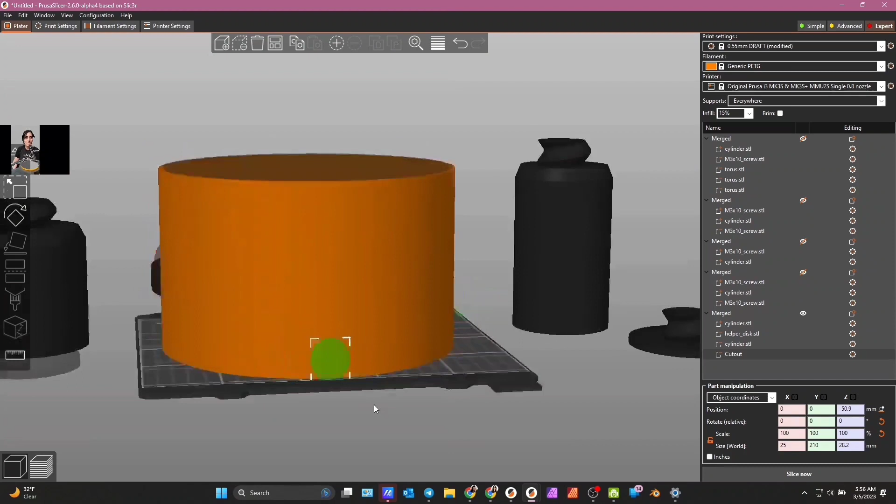Okay, so yes, here, right here, you'll see that I made the cylinder extend out both sides, okay? I'm going to have to lift this up, okay? And I'm going to want to make it bigger so that it has a little bit more plastic on both sides whenever I do that.

I was tired when I recorded this. I recorded this at like 5 a.m. My youngest sister has autism, and I try to do this when she's asleep. We're at her day center, but I just noticed the computer trolls got me, so I'm doing this really quickly so people have this.

So you'll notice I made it bigger. I made it 70 wide and about 50 tall, and then I'm moving it up. You can do this however you want to.

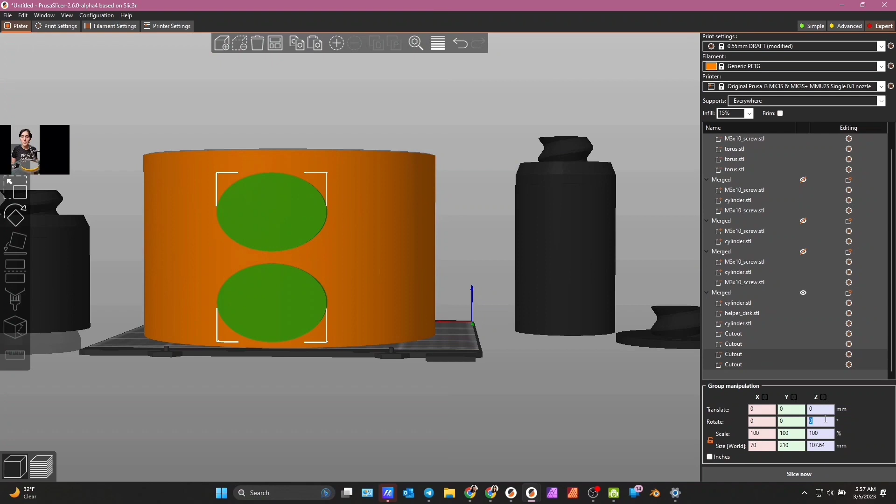What I do is I'm copying it and pasting it, and I'm taking it straight up with that move tool. Now I'm going to copy and paste both of these two together, and that's why it's important on the right-hand side that those are together with each other. So copy, and then I'm going to paste them again.

And then over on the rotate on the right-hand side, I did it by, I believe, 45 degrees. So I'm going to copy, paste, and rotate by 45 degrees. You could do it by 30 degrees if you wanted to. You could do it by 60 degrees if you wanted to, and you can play with it however you want.

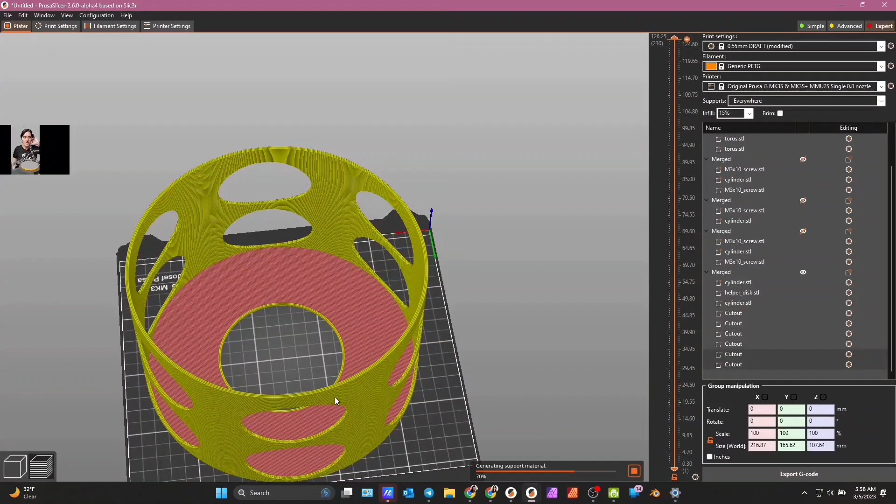Now, what I wish I would have done is made a hole in the top to drop the treats. I didn't do that. I should have done it. I can still do that. But what's nice about this is you can do that yourself. You have all the tools. All you would do is add a negative volume, add a cylinder, make it negative volume, and place it where you want to place it. Easy enough.

So here you notice that right there I added supports, and those look like they are grid supports. You will want to change them to snug supports, and my snug supports came out really nicely. You don't want to do organics because organics will reach outside the bed, and there's no way to do half organics, half snugs, and there's no way to choose for the organics to go on the inside.

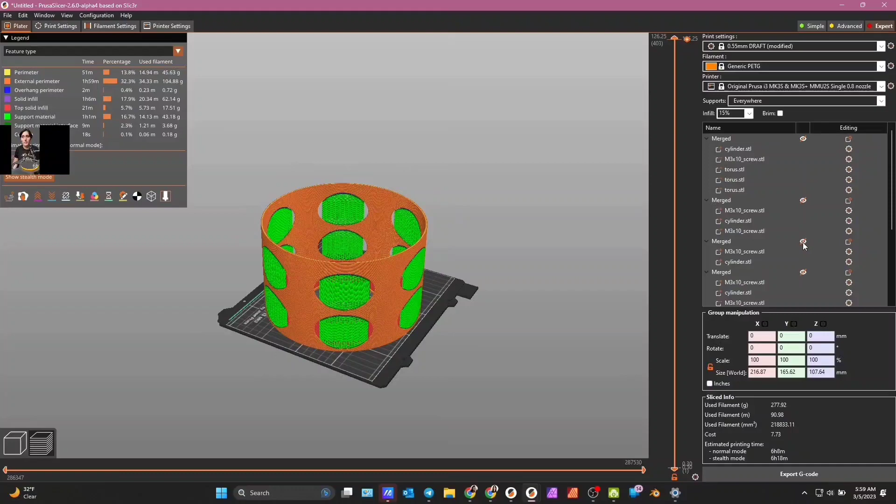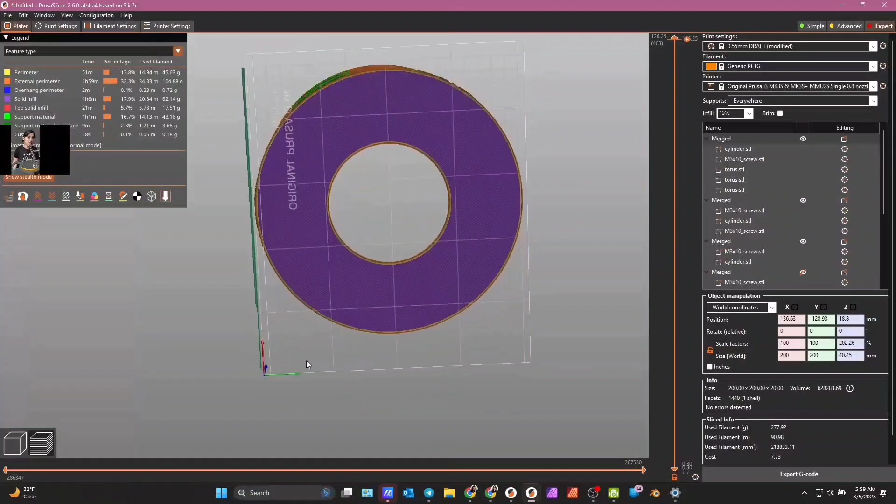So the snugs came out like that, and I typically print in PETG or ABS. I don't do PLA because I like my filament being able to work with higher heat temperatures, because I like to be able to take a grinder—I don't want to say grinder, a rotary tool—to mine. I don't like to hand sand anything. I don't recommend anybody do that, but I have safety equipment and safety masks, and I will use a Dremel, like a rotary tool, Milwaukee. That's what I use, a Milwaukee Dremel and a sander, and I will use that on my equipment, with my PETG, and that works pretty well.

I'm not hand sanding anything. So yeah, you'll want to use a mask and safety equipment and safety goggles. So yeah, that is how I did that. Pretty simple.

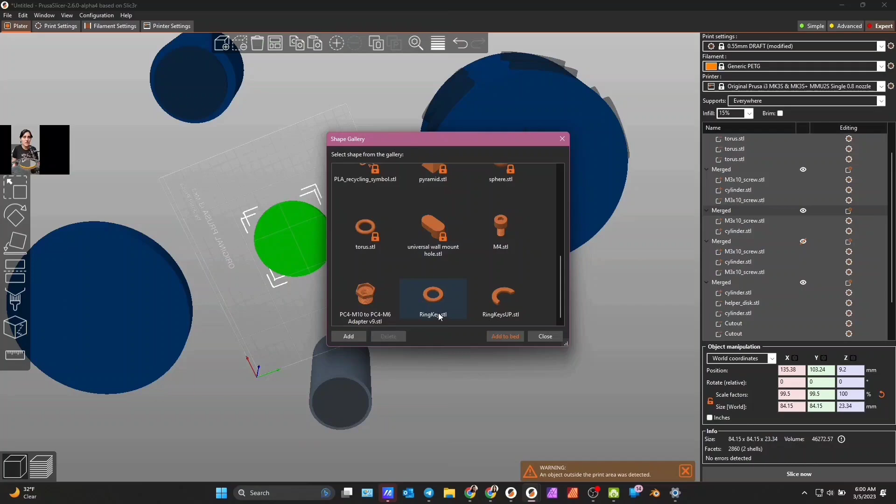Practically, it's kind of amazing what you can really do in Prusa. You see that right there—I'm showing, if you can see it in that itty bitty screen, all the models there. And when you want to print, you just use those little eyes on the right. You move the model you want off the screen, and then you click on the eyes to hide it so that it's not trying to print it, because that hides it from the printer, and then just center the item you want on the bed, and you can print it one item at a time.

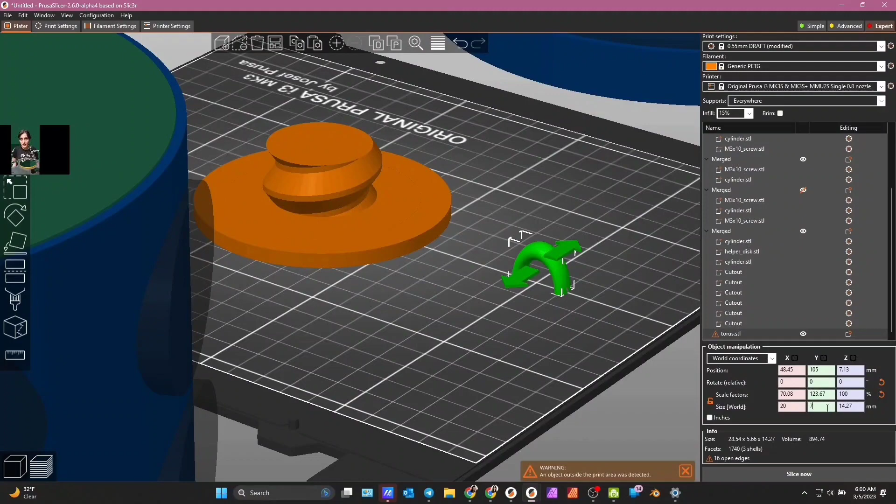Oh, and right now, so right here I decided—if you have a jerk of a cat, I love my cat, she's sweet, but sometimes she likes to throw her treat thing off because I have it on an elevated perch, because I also have dogs, and she likes to throw it off because she's learned that she can make all the treats fall out all at once. So she's really smart about that.

So what I did is I'm adding a torus to the bed, and I'm going to make it so that it can hang off. And if you want to make it a bird feeder, hey, you could even turn this into a bird feeder. You can do so much—it's a bird feeder now. So I'm making this a torus, and I'm playing around with the settings because there's a lot you can do. I think I was trying to see if I could make it with minimal supports here.

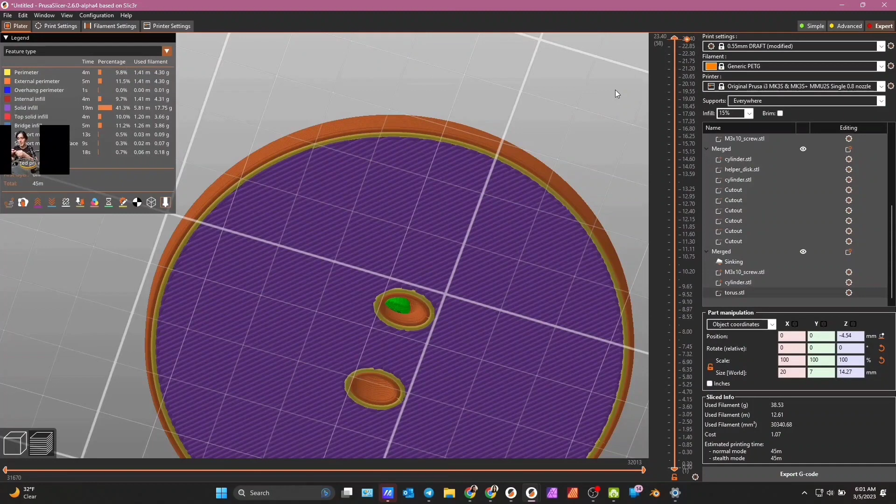If I wanted to make it with minimal supports, I'd probably need Blender, or I'd need to find an STL that was already more triangular. I could have created it if I'd taken two squares, shaped them into rectangles, and cut them so they made two 45-degree angles. It'd be easier to show you, and that's probably something I'll do next time. If you cut them that way, you could make it so it wouldn't need supports.

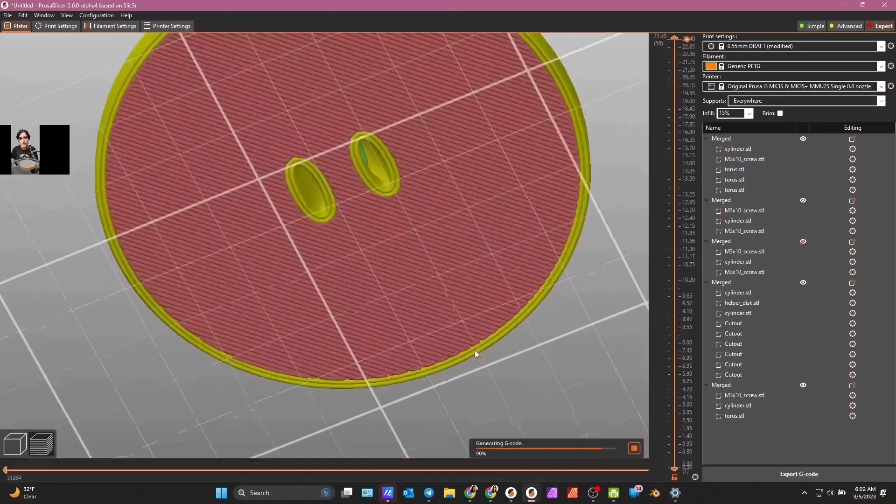So there you go, you'll have to dig out that support. Hopefully it wasn't too hard for me to dig out. You'll probably want some kind of prying tool to get that out. Hopefully it's not too difficult for anyone to get out. Might be a little annoying, in all honesty, to get out. I'm resizing it—if you make it a little bit bigger, it'll be easier to get out.

But this is the great part of it—size it to whatever you want. And if you don't want it, and you have a cat that isn't as high maintenance as my little princess, then you don't have to add it.

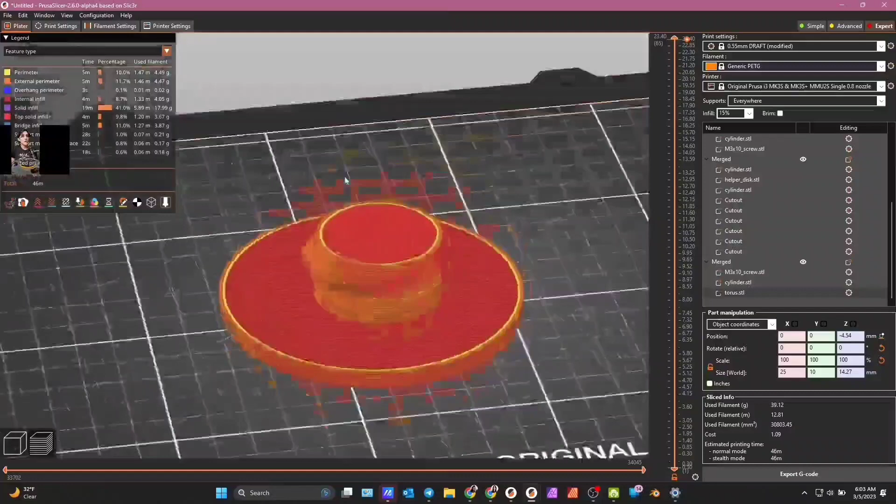Inversely, you could turn it upside down and make it so that instead of being inside the model, it's outside. You could also take that torus, cut off a little bit off the bottom and top, put it on the side, and add hooks to each side. There are just so many things you can do with this—you're not limited at all.

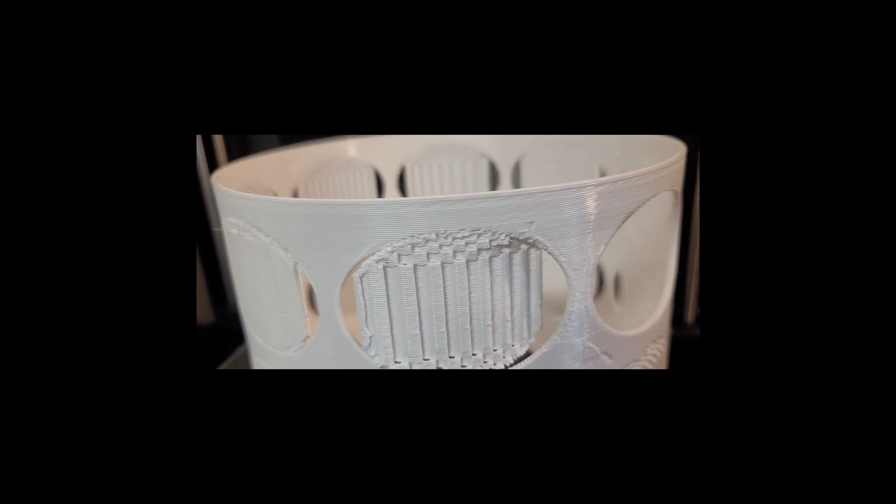For the most part, you can kind of take it off with your hands. I want to take it off carefully because it's a thin piece. For the parts that don't come off, if you have flush cutters, this would be the best time to use something like this. It's kind of hard to do with one hand, so just go very gently.

This is not something I recommend anyone do—I was wearing a face mask. One thing I like about PETG and ABS, and a reason I don't tend to print in PLA, is I like being able to use my rotary tool, like a little grinder, to gently sand away some of the edges. It's a nice way to do it and makes things a lot faster. I probably did all of that in 4 to 5 minutes, but there is a little cleanup required. So a heads up: don't do that inside, you'll have dust particles everywhere. Wear a mask, take all safety precautions, and prepare before using a rotary tool, since dust will fly everywhere and you risk ruining your print—so do a little test first.

One thing I do wish I'd done is make a little hole here so I could drop the cat treats in, but here it is assembled, and there it is. You can see there's a bunch of cat hair on it because Kitty's already been playing with it.